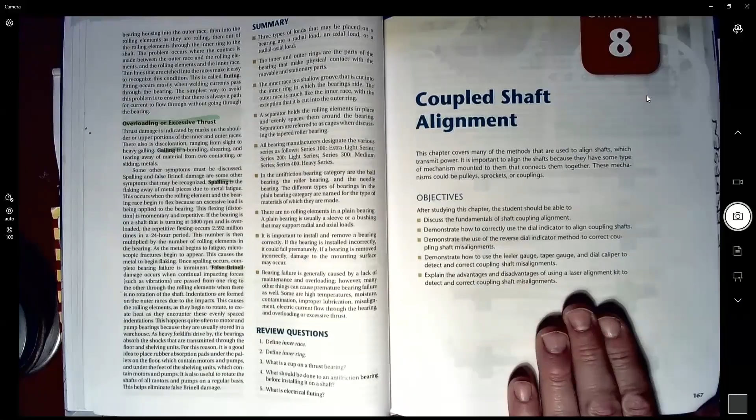some training for it. So what I'm really wanting for you guys to get out of this class is learn some key terminology, and I want you to learn the basic concepts of how you do these shaft alignments. And the great thing about doing the shaft alignment now is you've already done it once. You've already done it when you set up your V-belts, and again for the chain. So you should have done it twice. So getting into the science of it, how it really works now, since you've physically done it, will give you a little bit better insight.

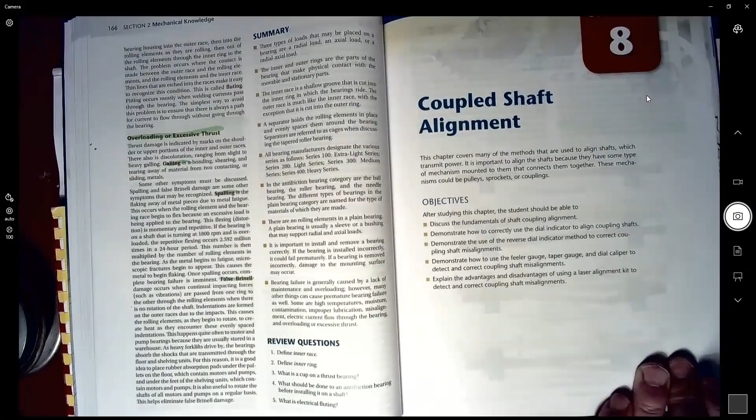So let's talk about shaft alignment. In page 168, section 8-1, it takes you through how you line up pretty much a pulley. This is straight out of our lab, and I'm sure you guys have all run into these pulley misalignments and have had to adjust them manually, painfully in some cases, to get a perfect alignment between your pulleys. So now we're going to learn about the different specific terms you need to remember when it comes to misalignment.

So why is it important to remember the terms? Because it lets you communicate with your bosses, with other maintenance technicians accurately. So rather than waving your hands around and holding up your fingers to describe how the alignment is working or not working, you can give them the specific kind of alignment or misalignment that you're running into, and they can support you in that process. And obviously, you'll get more credibility if you really know what you're talking about here.

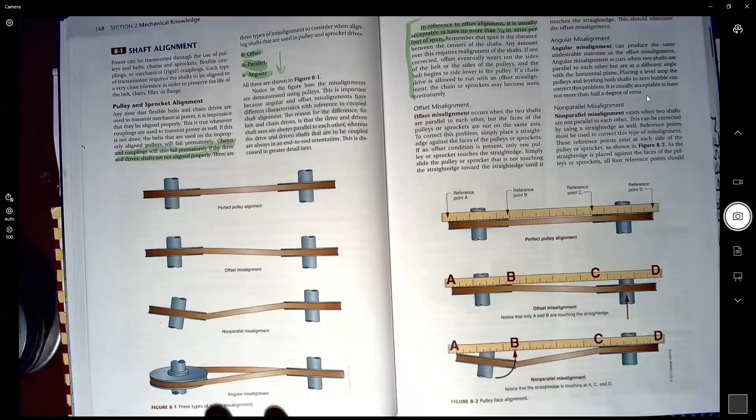So the book talks about three basic misalignments between pulleys. We've got offset, parallel, and angular. And they show you a lovely illustration of that on page 168. So your perfect pulley alignment is here. That one probably doesn't need any explanation. Offset means that one pulley is slightly offset from the other, but they're basically aligned otherwise. You also have non-parallel misalignment, which means that one pulley is tilted away from the other pulley.

And then you've got your angular misalignments, which basically means your belt has started to twist. You have sort of a taco effect going on, and the angles of the shafts are no longer parallel to each other. So these are very important key terms. So you have to remember the offset, parallel, and angular misalignments.

The book takes you through the procedure that we went through very briefly in the lab. The book takes you through a much more rigorous procedure in doing that measurement and describes those 4 points, A, B, C, and D, that we very briefly went through in the lab. So you wanted the outside and inside points on your pulleys to be able to line up right up against the straight edge, and we actually did that as part of the labs. So it's worth reading through this, but I want to mention one key thing.

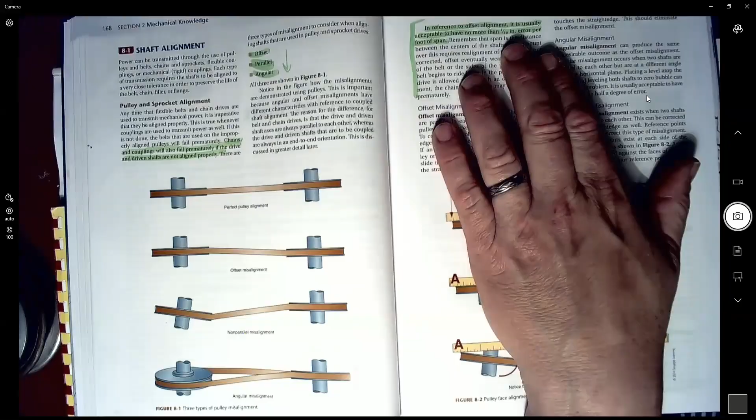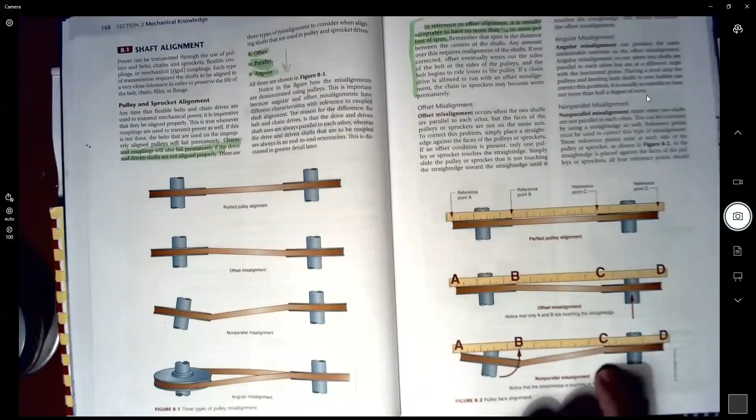So our span was roughly 1.5 feet. So our error could have been as much as 1/10 plus 1/20 of an inch, which is probably around 1/8 of an inch would be my guess. And so as long as we got within an eighth of an inch in terms of alignment, as measured from your worst error with the straight edge, then you're probably going to run that belt okay. So it's a very important number to remember.

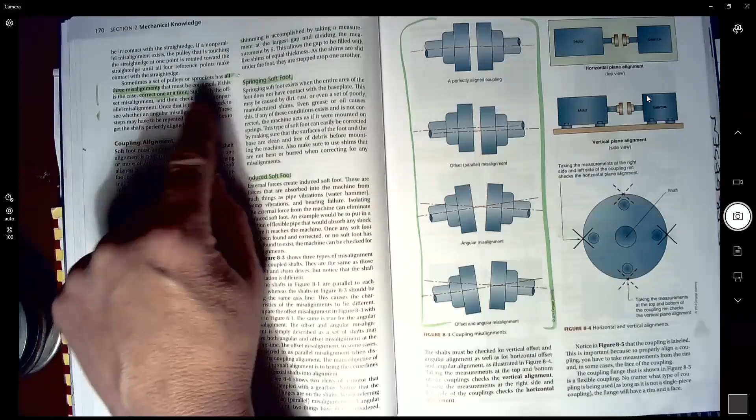So I want to mention, as they go through how all of these alignments can be fixed, one key fact here right at the end of these pulley misalignments. And that is all 3 misalignments must be corrected. And if you've got a lot of misalignments between your pulleys, you've got to correct them one at a time, and then check each one over again once you've corrected it.

So basically, you can't just try to fix them all at once. Try to fix each misalignment one at a time. So that's an important procedural approach.

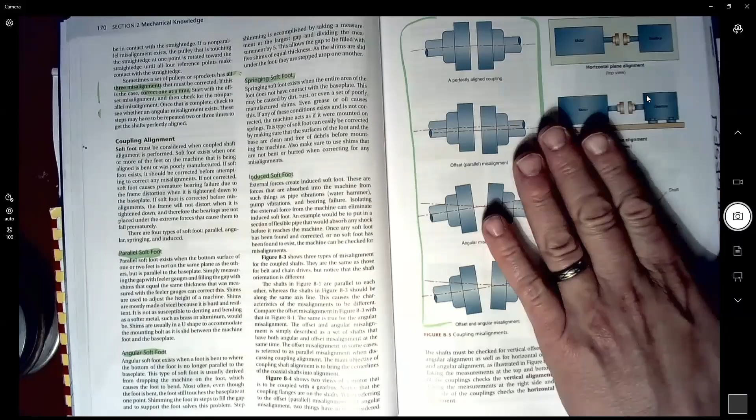Now in page 170, we jump right into probably the most important part about this chapter, which is coupling. What is a coupling? A coupling is the link between a motor and a gearbox, or a motor and a pump. It's basically where you want to have one shaft which is providing energy send that energy to another shaft which is going to use that energy. So it's often a connection between a motor and a pump and a motor and a gearbox.

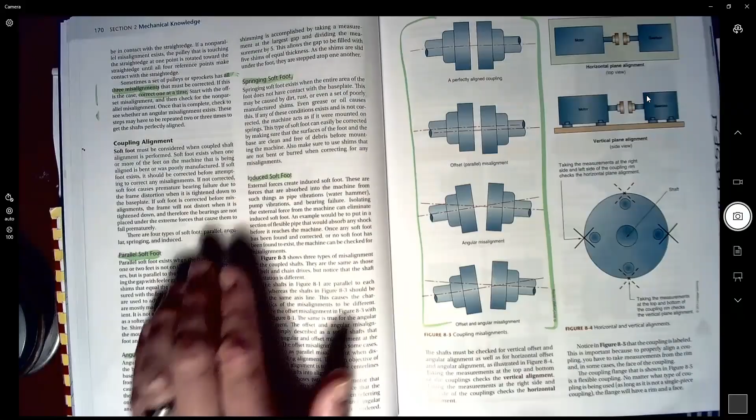And we're pretty much going to be just using 2 shafts during our couplings, but we're going to be simulating a potential motor and pump scenario. And some of the early discussions we get into, and I didn't highlight this, is the concept of soft foot. I've given you guys a video to watch on all the pre-alignment steps. There's 4 key pre-alignment steps you need to go through before you can do your alignment between 2 shafts properly to make this coupling work right. And one of those key steps is, well, actually 2 of them are related to soft foot.

Soft foot means that your motor is not mounted properly. It means that something isn't right with how that motor is mounted. It doesn't necessarily mean you've got like a soft mount, like a squishy mount. It could mean a number of different things, but it basically means that no matter what you do with that coupling, it won't necessarily stay in alignment properly. So first you have to fix your mounting on your motor to get it to work properly.

And so there's some key terms for describing soft foot. For instance, parallel soft foot means that the motor plate is not in parallel with whatever you're driving, say the pump or the gearbox plate. They're just not in parallel with each other. So you need to raise up the motor or reduce the height of the motor somehow to get it to align properly and make the 2 mounting plates parallel.

And then you've got a third category called induced soft foot. There's a variety of reasons why you might get it, and a lot of them have to do with the dynamic environment that you're mounting your motor in. You could have a lot of vibration occurring in that environment, so that as your motor vibrates, it goes in and out of alignment. So that's induced soft foot. So everything looks great until you fire up the motor, and then you get a problem with alignment. So you really have to go through a lot of steps to make sure your motor is mounted and set up properly before you get into your whole alignment procedure.

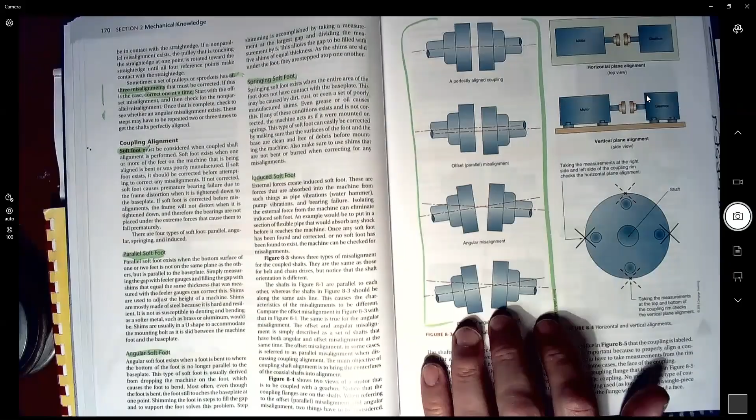Okay. Once again, we're showing the figures of how the different alignments look in the shaft alignment model. So now we're talking about transmitting power from one side of this coupling to the other. This book only shows one kind of coupling. There are dozens of different kinds of coupling, and in our lab we are going to be using at least 4 of them. We're going to be using 4 different couplings, and you're going to learn some basics about those 4 couplings. But this is what those different types of alignment look like.

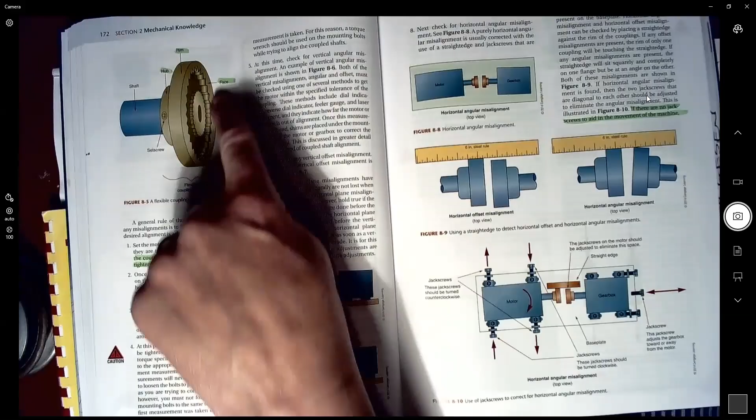Now, many couplings between motors and pumps look like this. And it's basically a flange. This is on one side and almost identical on the other. And then you've got some sort of rubber compression power transmission device that gets pressed between those flanges.

And in order to make sure your shafts are in alignment, you can measure on several of these things in that coupling flange. And it's going to make more sense when we get into the lab and we actually look at one or two of these. But you should know that the face of the flange is the part facing outward towards the other matching flange on the other shaft. The rim is the outer rim, that's kind of obvious, and the hub is the part where you've got your set screw, and that gets screwed down to the shaft.

They go through a procedure for mounting these flanges, and this is a very, very useful procedure. I expect you guys to follow this procedure when we get into the lab, right? And one of the first steps is once you've got your gearbox and motor, or your motor and pump in some cases, you want to make sure that the coupling flanges are on the shafts before you tighten them down. Why? Because a lot of times you won't be able to fit this flange onto the shaft between the two different shafts when it's all tightened down.

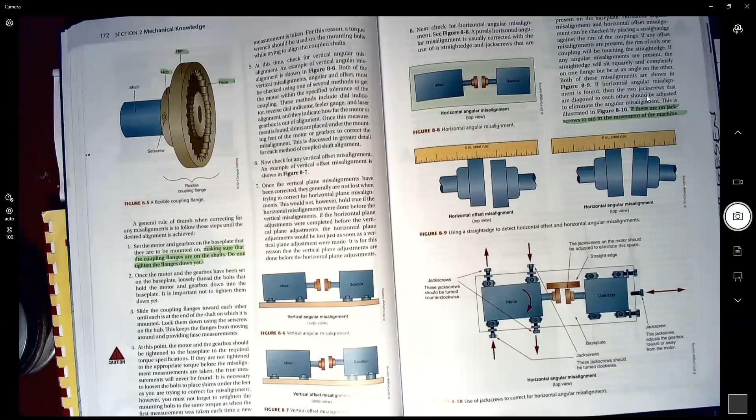So what we want to do is slide this onto the shaft, slide it out of the way, back up against the motor or back up against the gearbox, and then bolt down your motor and gearbox. So we're going to be following that procedure in the class and in the lab. So this is an excellent procedure. Read through it. If you have questions, then we'll definitely get them answered in the lab.

The book talks a lot about motors and pumps, and I have to admit that mostly what you're going to run into in motors and pumps, or motors and gearboxes, is very big, heavy-duty devices. The pumps I've used run anywhere between, say, 1 horsepower up to 100 horsepower, and they are so big you can't lift them individually. You need like a fork truck or a crane to move them. And they're very, very tough to move around.

And so a lot of times they're mounted with these jack screws, these screws that you can tighten or loosen to move them around to give you a precise alignment. And here on figure 8-10, it shows you a typical jack screw arrangement on your motor. You've got 4 screws that you can use to push this motor back and forth or rotate it. By tightening these screws and loosening those screws, you push the whole thing down, and vice versa.

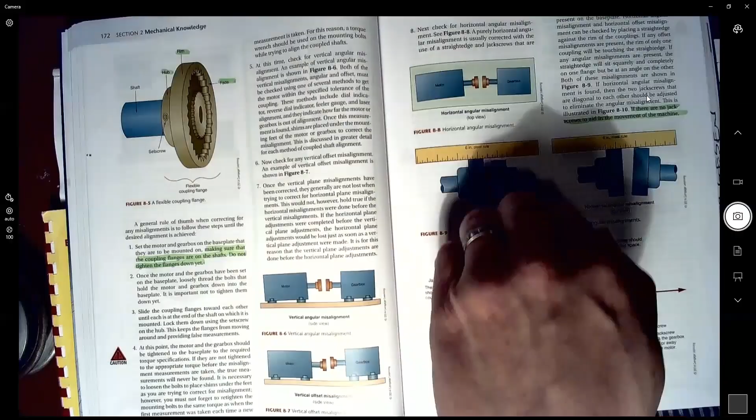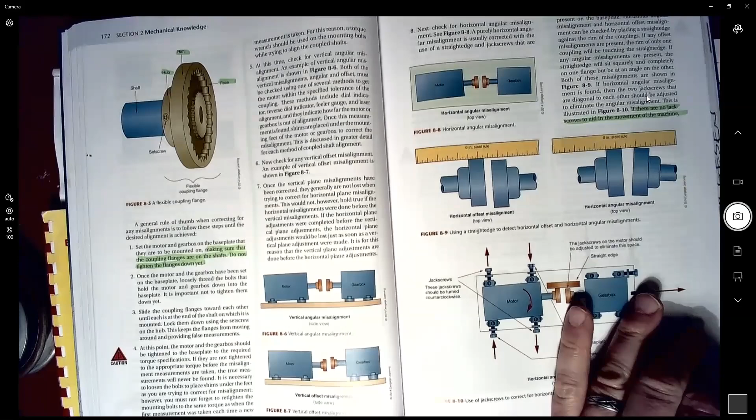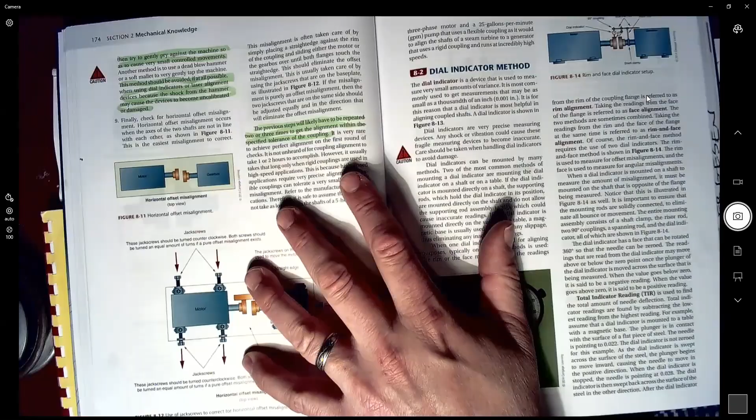But in many cases, you don't get jack screws, which is why I have highlighted this little thing. If there are no jack screws to aid in the movement of the machine, which is true for many smaller horsepower devices that are still very, very heavy, then you want to gently pry against the machine so as to cause very small controlled movement. So gently pry against means use a big screwdriver or a small pry bar to gently nudge it. A lot of guys will show up with a hammer and bang against it. And this might be okay 20 years ago or even 100 years ago.

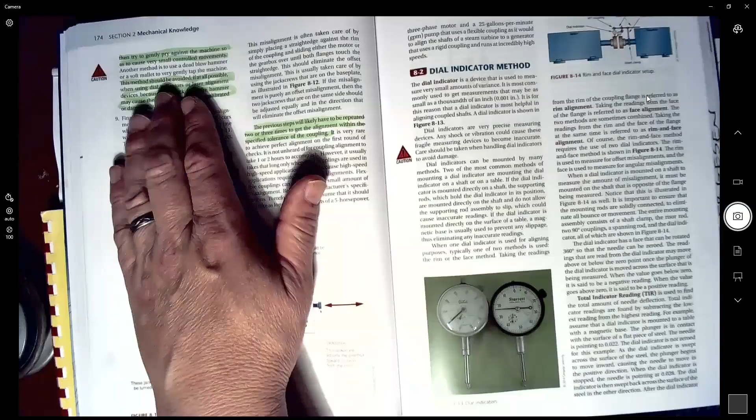But nowadays, if you have any kind of electronic device attached to that motor or that pump, and a lot of them now have electronic devices to measure vibration, then you're going to break it. If you've got your laser alignment or your dial indicators attached to that device and you bang it with a hammer, you may break those electronic devices. So this is my highlighting of this as a strong warning to you.

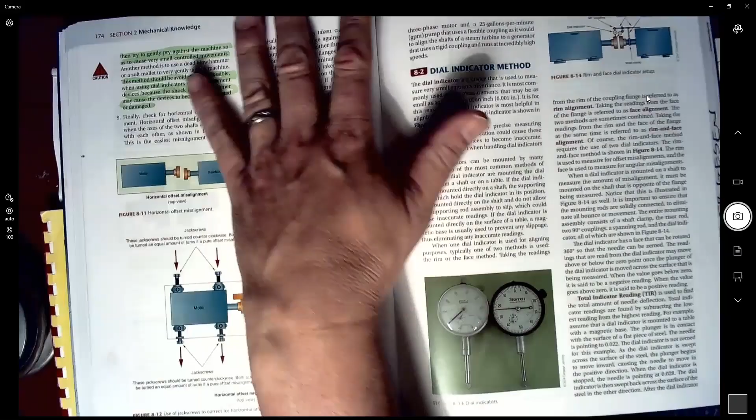So this is sort of how you do all your pre-alignment steps. This book is providing you some good ideas for that, but the video is better. There's a video talking about the 4 steps of pre-alignment. It does a very, very good job of taking you through all those steps.